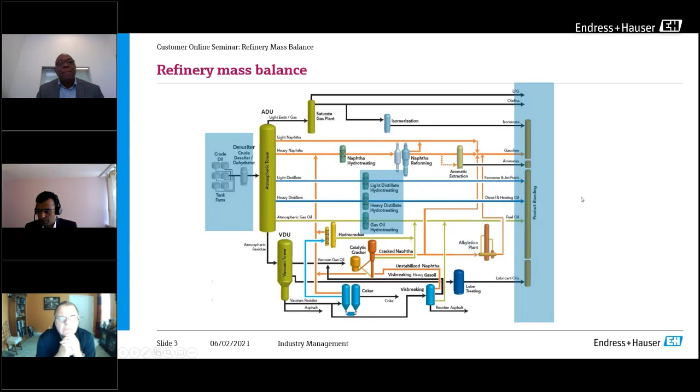Excellent. And Osmel, you have always preached to us at Endress Hauser on this equation: input is output plus losses, and all the other equations. Can you go into more detail as to what you mean by generation, consumption, and all the other terms we see on the screen?

Yeah, this is a very simplified way to see balance of material or mass. Probably one of our attendants can say, okay, this is quite simple, probably it's not exactly like this, and of course it is not. But probably we can illustrate in a simplified way what we are trying to do with the mass balance.

We need to do this comparison between the amount of product that is getting in and the amount going out. But as in every real process, not an ideal process, we have losses. If we break down this relation between input, output, and losses a little more...

...then we will have the amount of product that is intended to produce or generate energy for the same process. In some cases we can even sell part of this energy that the refinery is generating, the outputs we already mentioned, another part of the product that is consumed by the process itself, probably heating or preparation of the fluid, creating conditions for the process to occur as expected, plus losses.

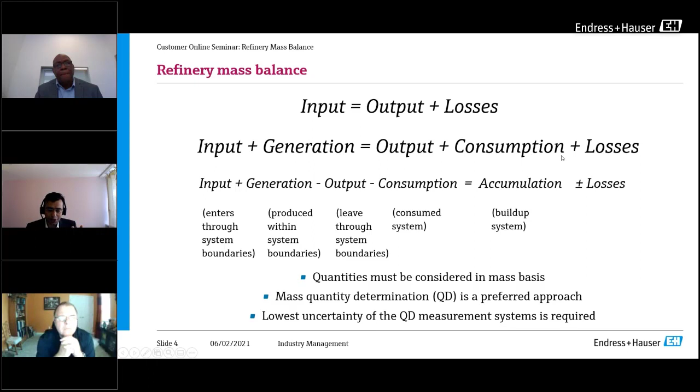So it's a very interesting thing you mentioned, real or apparent losses. Now, when we look at a refinery, let's talk of two examples here—maybe a small scale, or in your language, micro refinery and mid-scale refinery. But before that, I would like to point out that you always mention this quote: no matter if losses are real or apparent, if the product is not properly measured, the refinery will not earn the expected benefits. Can you expand on this quote? I think this is like the first sentence of the Bible for anybody working with refineries, right?

Yeah, and I think it is a very consistent way to relate our concern about losses and what we can do to reduce them, no matter if these are real or apparent losses. Probably one consistent way to make that differentiation, and to reduce apparent losses so we only concentrate on what is actually losses, is improving our measurement system. That improvement has a lot to do with the topic you mentioned before—probably we can illustrate the impact of different bands of error in a measurement system in a refinery.

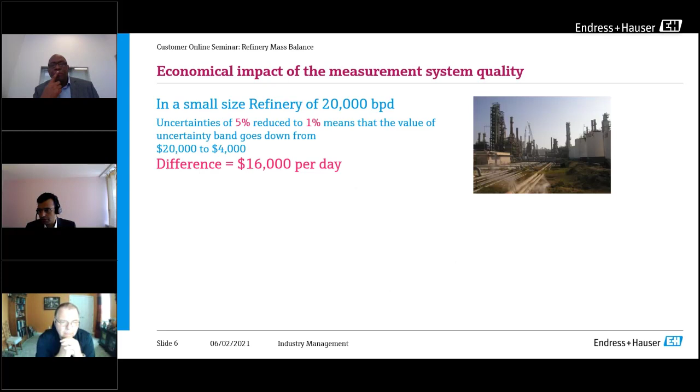Excellent. So let's look at two examples, one micro refinery and one mid-sized refinery. Why don't you explain in detail how much real and apparent losses we could expect? Yeah, this is a very interesting topic, and of course it's a general approach, which is very complex. We are not trying to simplify it too much—we are just trying to illustrate what we want to say.

When we, in a project or in our daily life, are improving step by step with small measurement installations, we don't necessarily have to do a big project, but probably we can do this gradually. And in every case, when we start to reduce our band of error, uncertainty - using uncertainty not as a metrological concept, but as the capability, or the absence of capability, to differentiate what exists and what doesn't exist.

But if we are able to improve our measurement system to reduce that band of uncertainty, then our losses, whatever they are, will be outside it. We will be more capable to differentiate or detect any loss. And at the end, these losses have a great impact on the economical performance of the refinery. In numbers, if we are working with a band of error of 5%, and we are able, in practical terms, to reduce that band to 1%, which is a practical and achievable target,

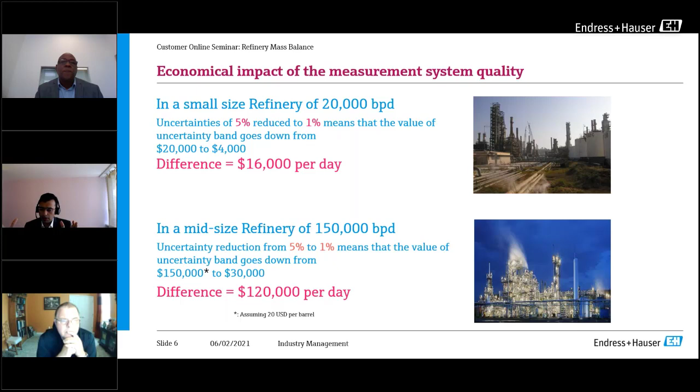Thanks, Osmel, for clarifying this. Now, you have covered the situation of achieving a plant-wide refinery mass balance. Let's look at the situation of unit operation mass balance. And I know you are a man of equations - you basically like to go into details. So we have the slide, please explain to us what it means to have a unit operation mass balance for a distillation unit.

Okay, again, this is a general approach. Of course, we are not considering details here, but in general terms we are trying to make a balance between the flow rate, volume of product entering our atmospheric distillation unit and the cuts that we are obtaining at the different levels of this distillation unit. But this comparison, in principle, will be done on a volumetric basis, because this is the tool, the instrument, the capability that we have most of the time to measure. At the end, even measuring on a volumetric basis, we need to convert that measurement in terms of mass, because what we are interested to know is the mass balance. And for that, we need to use some conversion factors, basically connected to the specific gravity of the fluid.

And this specific gravity is not always what we are expecting. That introduces error, which is totally the opposite of what we want to do, which is to reduce this band of error. That's why, at the end, this approach of doing volumetric measurement and converting it to mass in order to obtain a mass balance is a kind of limitation that we can overcome using other approaches.

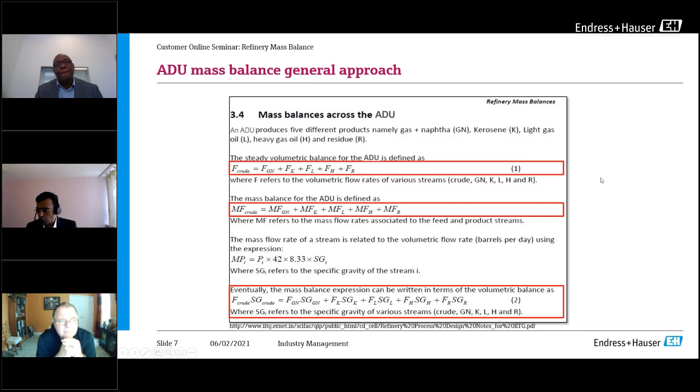Great, excellent. So when you mentioned ADU, I'm sure we can extend this principle of having a mass balance not only to the distillation unit or fractionator, but we can even take this approach to understanding how the mass balance is done. This is your famous diagram - I think you would like to mention something about it here.

Yeah, probably this is an explanation, or a way to illustrate what we have mentioned before. In this case, we are maintaining the same measurement points that are regular in a distillation unit, measuring the feedstock as well as the yields at the different cuts, as well as the recirculation loops and everything from the top to the bottom. But in every case, in every place where we are interested to improve the measurement - not in all cases, because we have, for example, pump around measurement - it's not intended or necessary to have an improvement or a change of paradigm in the measurement.

In those places where we have represented a mass flow meter, in this case a Coriolis flow meter, we are reducing, simplifying, and improving that conversion process we mentioned before. This conversion is eliminated because we are having a direct mass approach.

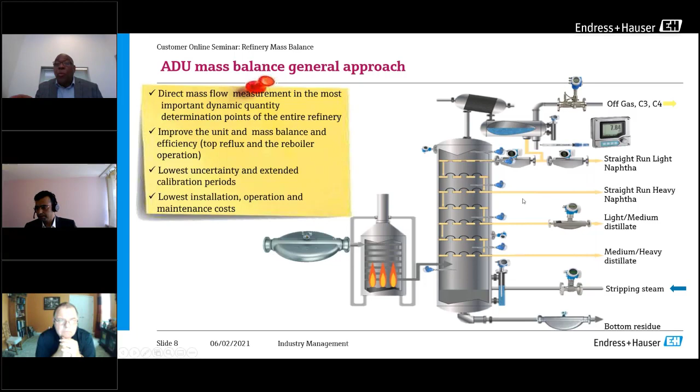This same diagram, this same idea, will also be implemented in other units, and probably we can have an illustration in terms of equations—the same idea of what is entering as feedstock in our unit and what we are obtaining as a result of the more complex process that takes place, for example, in hydrocracking or hydrotreating units, VGO, and another hydrotreater processing other feedstock.

The process is more complex, but at the end we have defined positions where the product is entering the units, and defined positions most of the time associated with a distillation column where we obtain the different products. These are the places where basically we can implement this approach. The mass balance is not limited to those points, but probably these are the more relevant when we talk about main measurements.

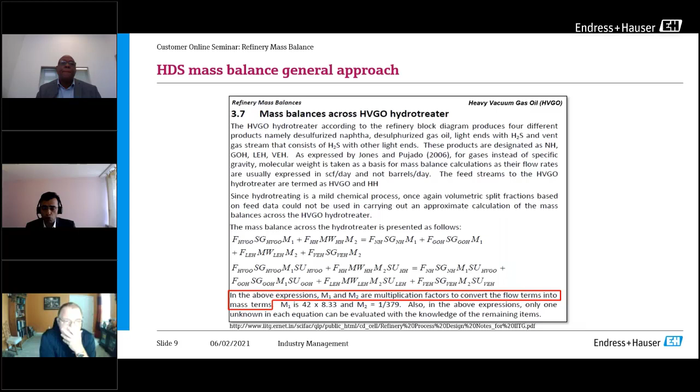When we talk about achieving unit operation mass balance, Osmel explained the example of the hydrotreater, but you could also look at fluidized catalytic cracking or any other operation. It helps you understand the activity level of your catalyst, helps you optimize and make your process more efficient, and you can achieve this by having a proper mass balance.

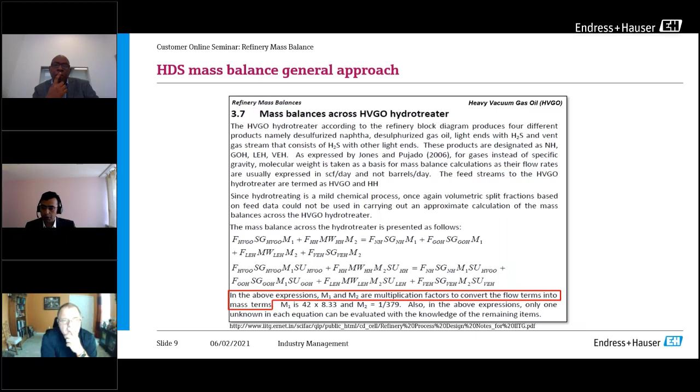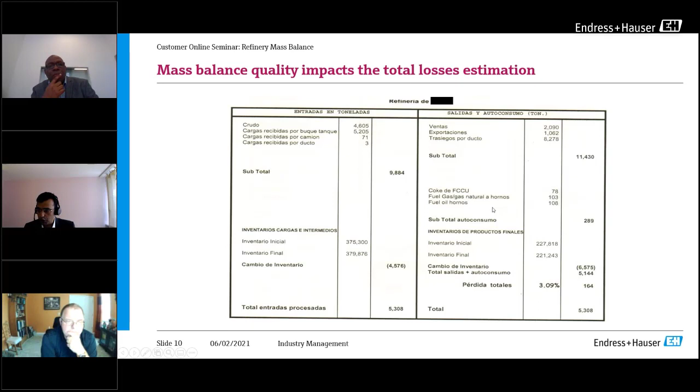Osmel has explained all the reasons why one has to go for a mass balance, not only at a plant-wide level but also at a unit operation level. So now let's look at some of the examples you shared with us based on your experience visiting a lot of refineries—though I cannot explain this in detail because this slide is in Spanish.

This is a simple summary of the mass balance procedure. At the end, we have also connected with this mass balance an estimation of the total losses we are going to have. These total losses are connected to the difference between what is going in and what we are obtaining, of course taking into account known destinations of products that we don't consider losses.

This calculation of losses—3%—you can imagine how much that represents in a refinery. This is what the persons in charge of this procedure assume as losses. If we have a more consistent measurement system, we can rely more on that value, and this 'more or less' is nothing but money.

That's why we need to be as consistent as possible in order to say, yes, these are my total losses. These losses are produced by physical issues, technological issues, or topics that we cannot approach or solve, and we have to deal with that. But it's not because I'm not able to see—it's because my measurement system doesn't allow me to see. The idea is to reduce that uncertainty by improving our measurement system.

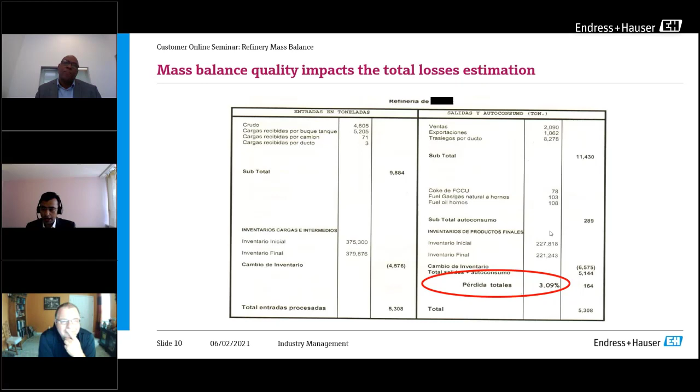That's the point where I feel there's a bit of a shift we're expecting, because in the oil and gas industry we always hear of barrels of crude oil and barrels of output products, which are actually liters of refined products. Now, when we talk about mass balance, density becomes a very important unit, and I'm sure you've seen a lot of density measurements. So what is your proposal for how we move this whole industry—which has been talking in terms of barrels, in terms of volume—toward mass measurement, but without losing accuracy?

Let me first say that refiners, and I consider myself 50 or 60% refiner, we are conservative because of the responsibility - economical, strategic, social responsibility - of the person that works in a refinery. That's why we are very conservative, always sticking to the standards and the approved procedures.

It means that when in a refinery you are going to measure density, the first approach and most probably reliable approach is lab measurement, in order to follow a known, international standard that everybody trusts and relies on.

But technology moves, and most of the time it's better and gives us benefits. This is probably the thing that we should do as a provider of measurement solutions: convince our customers, or let them know, that there are other approaches that are also trustworthy and can be gradually introduced, demonstrating that they are very reliable and bring benefits.

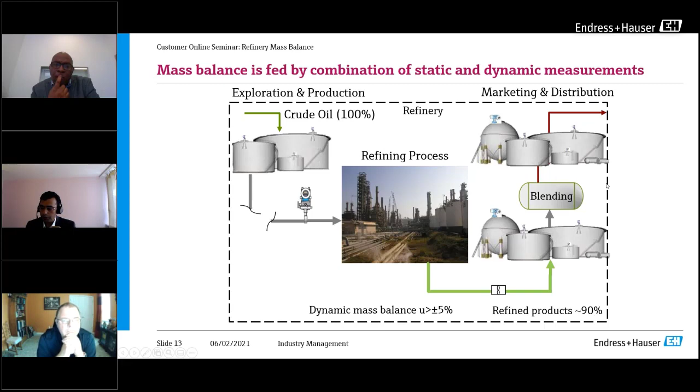Excellent. Now that you mentioned the point that instead of taking every single sample to the lab and bringing it back - to make sure the physical sample itself doesn't change in terms of property - when we look at a refinery, at this particular measurement point, this is the one which has a physical fluid flowing through it. The physical characteristics, physical parameters like viscosity, density, they change maybe even in a day, maybe during the seasons. How do we actually not have an influence on the measurement even in those situations? Can you cover how to improve accuracy even in changing inlet conditions? Maybe we are getting crude which is very viscous, so how do we make sure that we still get higher accuracy in those situations, Osmel?

Yeah, in this case, Jenish, we have different approaches, different ways where we address that interesting topic - probably our capability to deal with fluids that have some presence of a second phase, or fluids that have a change in density, which we directly measure. But probably one of the most interesting contributions we can provide to our customers is how to improve even in conditions of low Reynolds number. Later on we'll mention what that means, but basically we're talking about a product that is highly viscous, and how we can deal with conditions that, unfortunately, were not initially identified properly when this technology started - because experience and daily work have given us feedback and opportunities to improve our response.

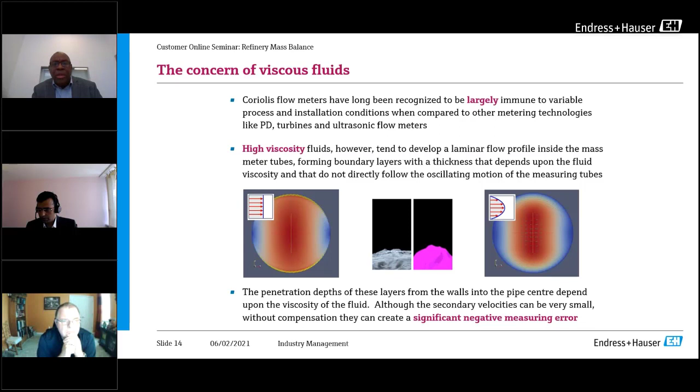This topic regarding viscosity is probably one of the most interesting contributions we have made lately, and it is based on our capability to measure, or to consistently estimate, properties of the fluid - in this case, viscosity. Let's move to the next slide to show what we are talking about.

And the impact of this effect could lead the meter to have a behavior that is outside the expected band, the expected error band, even the expected maximum permissible error stated in the standards. Refiners are conservative. We want to follow the rules. We need instruments that help us follow the rule, and this is what we are providing, what we are proposing. Something that even in non-ideal conditions works well. Remember, 50-100 years ago we had very light crude oils. Now the standard products we are processing in most refineries around the world are heavy products. We don't have that nice product we had long ago. So we have to deal with that, and even under this condition we have to fulfill what the standards require. This is what we can do with this approach of Reynolds number correction.

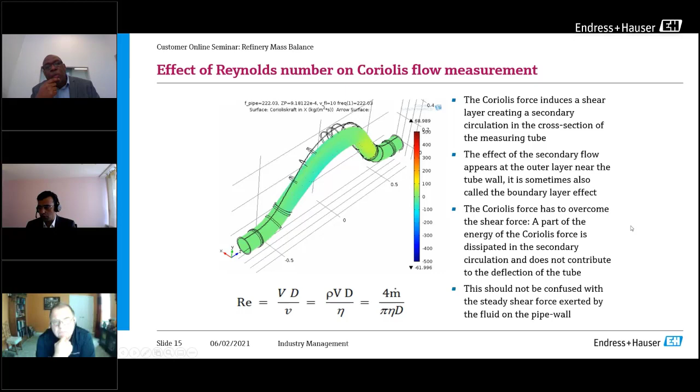So what you mentioned is we take into consideration the effect coming from viscosity changes, the physical parameters, and how easy it is to integrate these changes during calculations. Because it's all about calculations, and that's where the meter factor comes into play, right, Osmel? This is exactly how we close that loop, because we are able to measure or estimate viscosity. We are able to calculate the Reynolds number, and with that Reynolds number we are able to do a correction. With this correction, now we are able to do a calibration of the meter and calculate new meter factors.

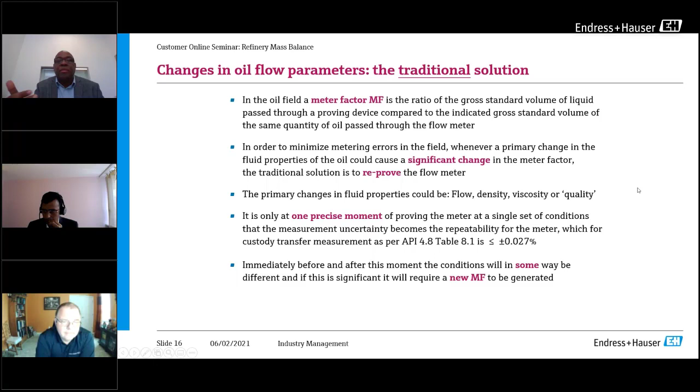Now we can see two levels of improvement. The first is the meter itself, with the capability to improve or correct its performance, taking into account the influence of low Reynolds dynamic conditions. This is the first step. But there's another step, when you can dynamically use this meter factor and describe the mapping of the performance of the meter in a flow computer with these values, reducing even more the band of error and improving even more the performance of the meter. This is the first example, the meter fulfilling the requirements of the standards even under this complicated low Reynolds condition.

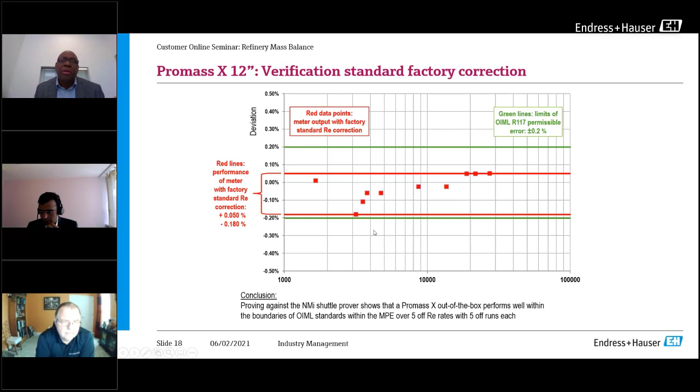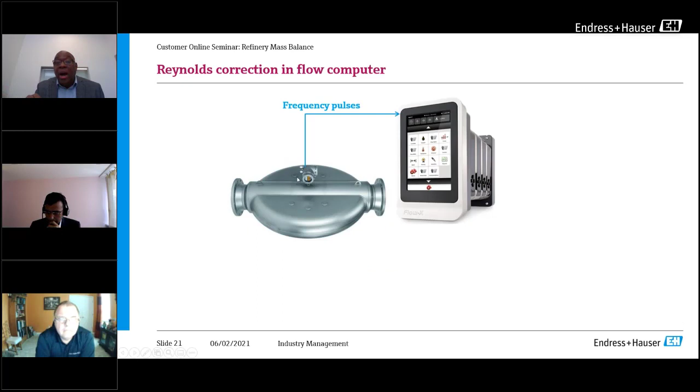It means a very high viscosity, less than 2000 in Reynolds number, which is a very high viscosity. Even under this critical condition, the performance of the meter is totally, definitely, by far better than the standard. But we can go beyond. We can do this correction dynamically, putting this information inside our flow computer, putting this collection of meter factors inside our flow computer, and having this even more stretched band of error that we have seen before. So you can see it's a gradual improvement, and it's definitely a relevant contribution to deal with the real process condition of the fluid.

Excellent. So we covered two important topics in the last couple of minutes. One was improving the density measurement, and the second was taking into consideration changing physical property conditions and correcting for it in real time, so that every time we make a measurement, we have higher reliability on every measurement we get. Is that correct, Osmel? Yeah, definitely. We are connected with the dynamic or changing properties of the fluid, and we take this information in order to improve our result.

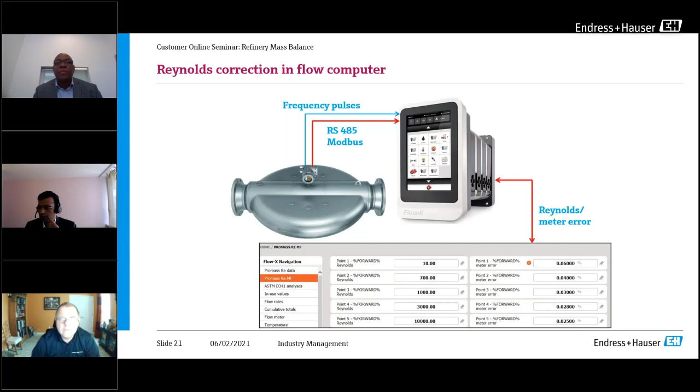Excellent. So I think it gives higher improvement, but again the question comes back, because refineries have been existing for a long time. What are your new answers, Osmel? Because I know you have been with refineries for over 25 years now. So it would make sense that you give us new answers to the same questions which maybe you experienced or faced when you started working with refineries.

Yeah, definitely. Well, I'm getting old, but I've seen different perceptions, different reactions of the refineries, including me as part of that big army, with these technologies. When we started, we were still rejecting some new technology that was coming, because we did not rely on that technology at that moment. And we have seen the evolution of these technologies and how reliable they have become over time. And now we can trust, definitely, and we can see all the improvement this technology brings, the benefits this technology brings. For example, in these four examples that we have, starting from the bottom left.

This Prosonic Flow ultrasonic clamp-on approach - nobody trusted that approach long ago. We were just using it as a survey meter, just to have a rough idea of what is going on. But nowadays, with the achievements we have, 1%, 2% accuracy even, we can compare and even improve the results we are obtaining, for example, with an orifice plate, without taking care of having modification during the installation.

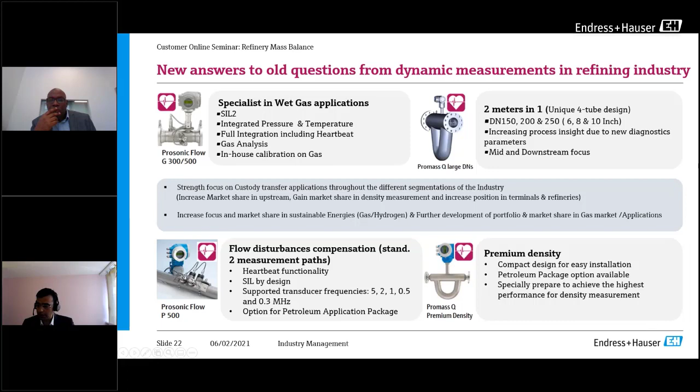With this, I think we have covered a lot of ground today, Osmel, and we would go back to the summary while Rob will help us with all the questions.

Okay, excellent. Do we do the summary now, or are we going to? Yes, we do the summary now so that we can look at the questions in the meantime.

Okay, well, this summary covers basically the topics we have mentioned before. But instead of reading these points, I would like to share with our colleagues some experience in general. First, the conviction that we, as measurement solution providers, are open to discuss with you the optimal, the best measurement solution for each case, each condition, because at the end, the person, the colleague who works in the refinery, is the one who knows exactly the conditions where we need to implement measurement.

What exactly you need to improve, and which are exactly the requests that we need to fulfill. We now have a broader catalog of options, and we are able to discuss with you which is the right solution for the specific conditions. Because again, every refinery is particular, and only the person in charge or responsible for the refinery has all the information required to be provided to us in order to give the right response. This is the main idea. We give a response based on your knowledge and your requirements.